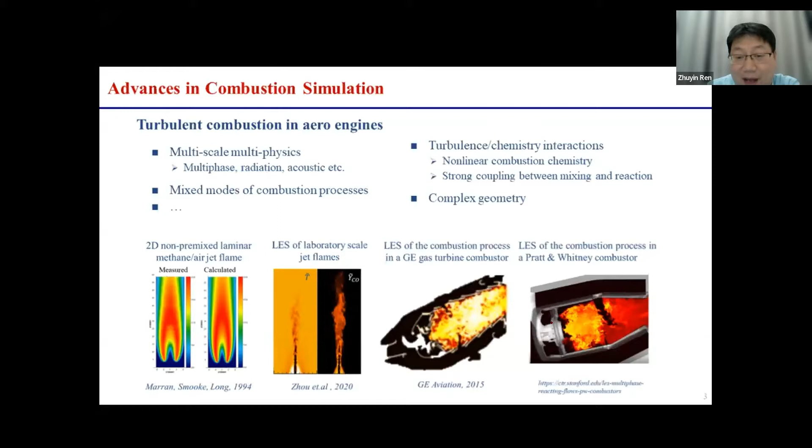Over the past 30 years, with developments in computers, numerical algorithms, and turbulent combustion models, we have seen big advancements in numerical simulation of flames. For example, back in the 90s we could do 2D simulations of laminar flames. Nowadays, we can do large eddy simulations of both laboratory flames and practical combustion devices like aero engine combustors.

Back in 2014, for revolutionary computational aerosciences, the so-called CFD Vision 2030 project laid out quite a comprehensive roadmap for high-fidelity aerospace simulations, including modeling and algorithm development needs in various areas. Within physical modeling, the use of realistic chemistry in large eddy simulation of turbulent flames is one need.

And on the algorithm side, uncertainty quantification is also quite an urgent development need. So in the following, I will describe our recent progress in these two areas, specifically the use of detailed chemistry as well as UQ in the context of the transported PDF method.

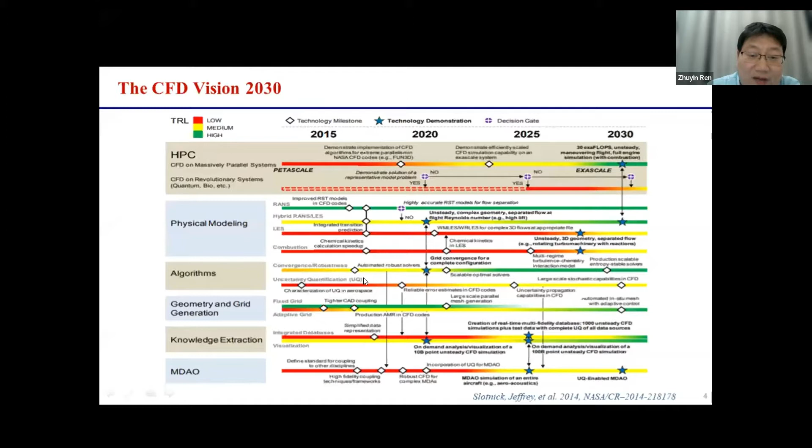Now, we know turbulent flames involve a wide range of length scales as well as chemical time scales. So very often, for practical combustion devices, one cannot resolve all the length and chemical time scales in turbulent flames by so-called direct numerical simulations. This is just computationally too expensive. So very often, for practical combustion devices, one uses statistical models like RANS or the LES approach.

In both these approaches, only the integral length scale or the large scales are resolved, while the small scales, like small eddies and sometimes the small flame features, are not resolved and need to be modeled. One thing I want to emphasize here is that, unlike non-reacting flows, in which the small scale motions like the small eddies are dominated by the large scale motions, and in that scenario the modeling for the non-resolved small scale phenomena is pretty straightforward.

For turbulent reacting flows, unfortunately, the most important heat release processes occur at these very fine flame structures, which are not resolved and which should be properly accounted for in turbulent combustion modeling. So because the small scales are not being resolved, we run into this big challenge in terms of modeling the mean reaction source term.

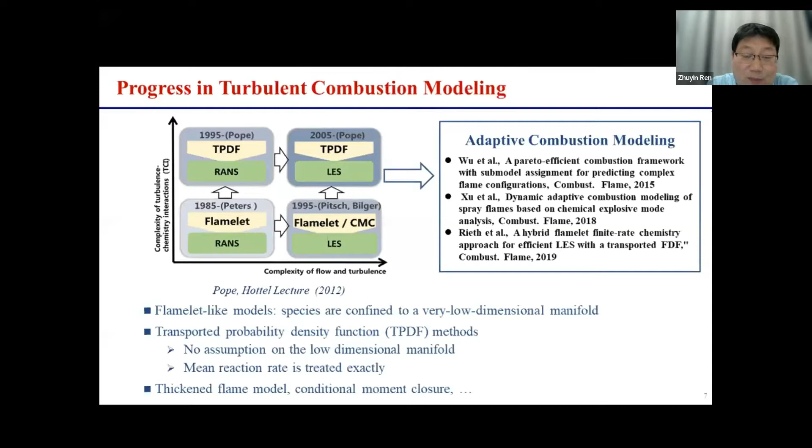So no matter what, in terms of combustion modeling with transport PDF-like models, we don't assume the existence of a low-dimensional manifold, and in the transport PDF method the mean reaction rate is treated exactly, without any modeling. So in that regard, transport PDF modeling with detailed or realistic chemistry has an advantage in resolving near-limit phenomena. Next, I will briefly review some fundamentals of the transport PDF method. Then I will describe our recent work in zone adaptive modeling based on the transport PDF method.

Now let's assume we are considering the one-point, one-time joint PDF of compositions. What you see here is the governing equation for the joint PDF of composition, which consists of enthalpy and species mass fractions. In this transport equation, you'll notice that the chemical reaction source term is in closed form. Because we only use a one-point, one-time PDF, we don't have any gradient information, so the term which represents micromixing, essentially a molecular diffusion effect, needs to be modeled.

So the first success we see in the application of the transport PDF method dates back to around 2000, pioneered by a group at Cornell as well as Imperial College by Professor Peter Lindstedt. In that application, they demonstrated that for the really challenging Sandia flame D, E, F series, by using the transport PDF method, you can well represent local extinction and reignition. So that's the fundamentals of the transport PDF method.

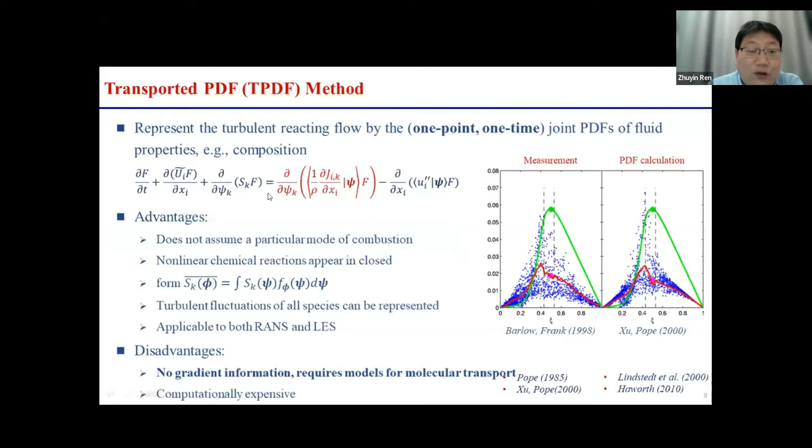Due to the high dimensionality of the independent variables, if you directly solve this governing equation using a finite volume method, the number of independent variables is pretty high. So in reality, very often we use a particle-mesh solution method, essentially a Monte Carlo method to represent the joint PDF. In the simulations, you release a whole bunch of computational particles, and each particle represents one parcel of fluid. These particles evolve in the computing domain following the velocity field, and interact with each other by exchanging mass and energy, which essentially represents the micromixing process.

And also, these particles will react and essentially go through the homogeneous reaction process. So as I illustrated here in this animation, what we can see is this particle mesh solution method. The LES provides the PDF solver with resolved mean velocity and the field velocity, etc. And the PDF solver will feed back to the LES solver with the density as well as sometimes the reaction source information.

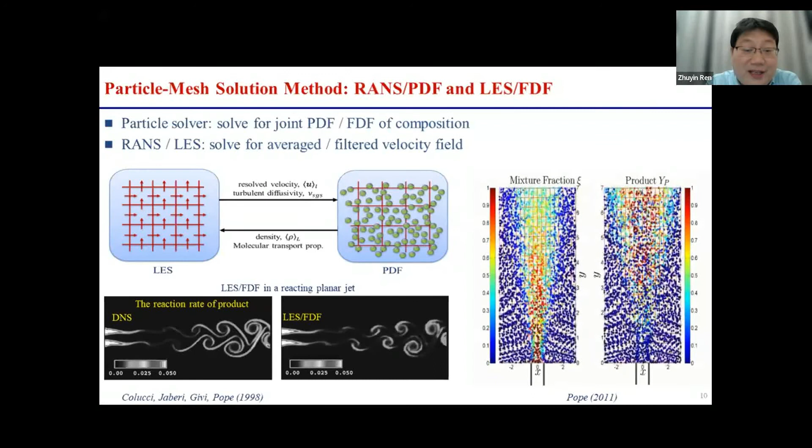In terms of the computational platform for the transported PDF method, over the past years we see both the block structured mesh computational platform such as the HPDF approach, and also unstructured and commercial platforms like ANSYS Fluent, which does have transported PDF. People also coupled the transported PDF method within OpenFOAM, the open source code. People have demonstrated the use of transported PDF for both laboratory flames as well as practical combustion applications.

As I mentioned earlier, the first successful application of transported PDF is for non-premixed flames, like the Sandia flame D-F series. Nowadays the application of transported PDF has been extended to premixed flames and partially premixed flames, as we recently demonstrated for the Sydney partially premixed jet flames, and we obtained very good agreement with experimental data. Also Han et al. extended transported PDF to simulating sooting flames, and recently we extended it to simulating the dilute ethanol spray flame.

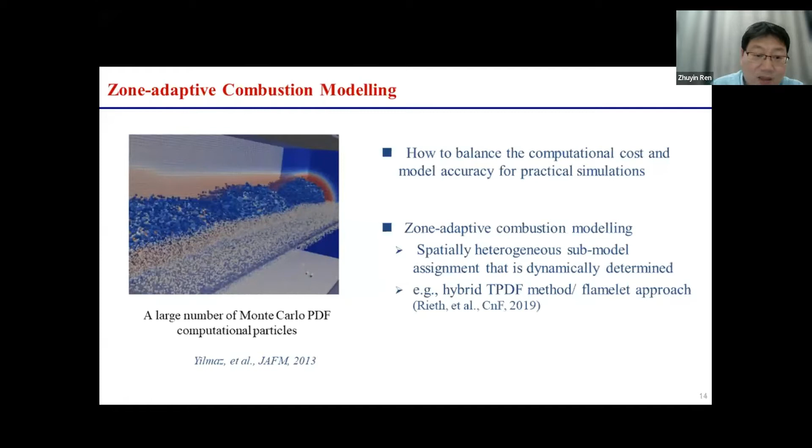So in terms of the coupling between the sub-models in this adaptive approach, what we do is we use a base model to solve the whole domain, and this base model will provide the high fidelity PDF region with necessary boundary conditions like the mass flow rate, etc. So those are buffer regions.

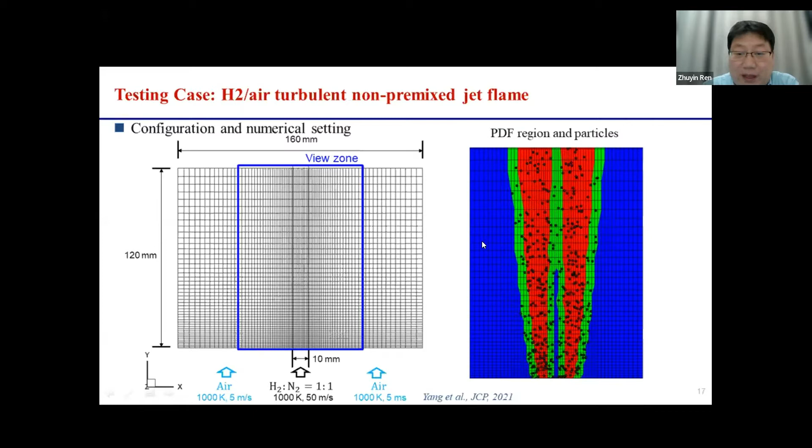Now, with the adaptive modeling approach, what you will see is only along this high intensity reaction region do we assign the transported PDF method, and in the blue region, since there's essentially no reaction activity, we use the one-step laminar flamelet model, and essentially you don't have any computational particles.

What I'm showing here is a comparison between the different modeling approaches. You will see three results here. The laminar flamelet model is the prediction with this model with a one-step mechanism; these are the blue curves. The TPDF is the standalone PDF method, where you solve the problem using the transported PDF for the whole computational domain.

The adaptive approach means only in the highly intense reaction region you use transported PDF. Otherwise, for the remaining regions, you use the laminar flamelet model with simple chemistry. So the key message here is that with this zone adaptive modeling approach, it can maintain the same accuracy as the standalone transported PDF method. So the accuracy is preserved.

We also examined the convergence characteristics of this zone adaptive modeling approach, and what we found is that the RMS error decays with the number of particles essentially the same as the standalone PDF method. More importantly, compared with the standalone transported PDF method, for this really simple problem we can achieve a computational speedup of about 2.1 for the whole simulation.

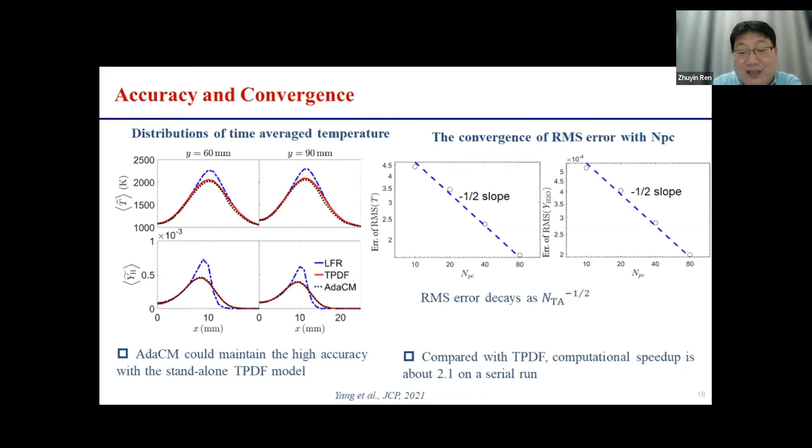So with this adaptive modeling approach, we can maintain the high accuracy of the standalone transported PDF model, but at the same time greatly reduce the computational cost. So that's the progress we made for the transported PDF method in terms of how to accelerate the calculation, by using zone adaptive modeling.

Another key ingredient for which the transported PDF method very often gets criticized or doubted is its modeling of the micromixing process. So in the next few slides, I'm going to introduce what we have done for micromixing models. As I mentioned, since we very often consider the one-point one-time PDF, we don't have the gradient information, right? So the molecular diffusion has to be modeled.

What a micromixing model does is describe the conditional diffusion rate, and a typical micromixing model can be cast in the following general form. The evolution of particle composition due to molecular diffusion can be represented by two pieces of information. One is the mixing format: within a computational cell you have a bunch of particles, and how a particular particle interacts with the surrounding particles is governed by the mixing format.

The second ingredient in a mixing model is how fast you exchange information, mass and energy, with the surrounding particles. This is governed by tau, which describes the scalar mixing time scale.

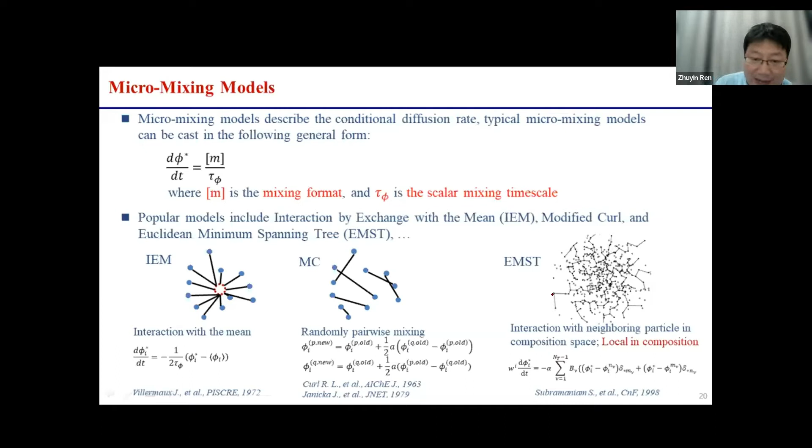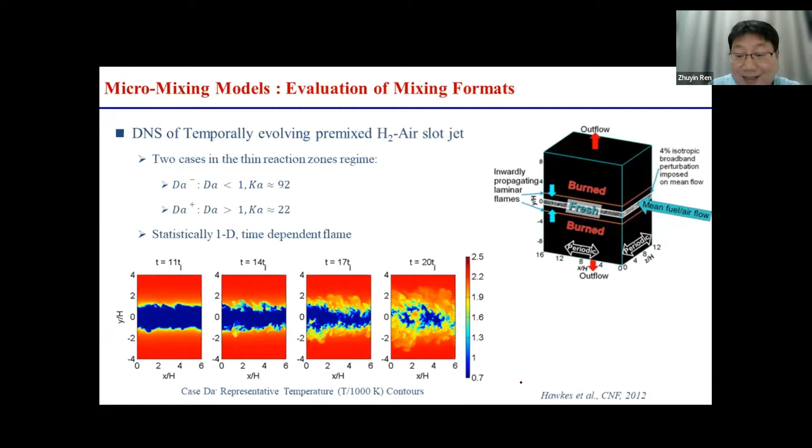So the first thing we did is evaluate how important it is to maintain localness when we consider mixing. We consider the DNS data of a temporally evolving premixed hydrogen-air slot flame. In this DNS flame, the flame is propagating from the outside towards the center. What you see here is the temperature contours at different time instances. Here we consider two cases, both in the thin reaction zone regime. The DNS was performed by Hawkes back in 2012.

So what we did here is perform a Lagrangian transported PDF simulation in conjunction with DNS. We perform this 1D flame calculation, and the transported PDF particles evolve their position following this equation and their composition following this equation. The unique thing in this type of simulation is we can extract all the needed information from the DNS data, so we can supply the velocity, the turbulent diffusivity, etc., and also the reaction source term from the DNS.

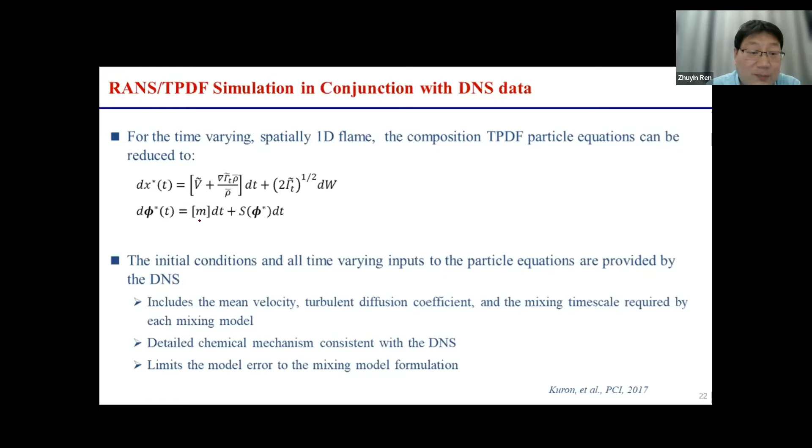So from this study, what we see is, for premixed flames as well, the localness in composition is very important to get an accurate prediction of the flame evolution. Now, one more thing: for the EMST mixing model, it is quite time consuming to construct the Euclidean minimum spanning tree in composition space, so the computing cost is relatively large. So we thought, is it possible to come up with a simple model which can maintain the localness in composition, but at the same time cut down the computation cost? This is what we recently came up with, the so-called kernel constrained mixing model.

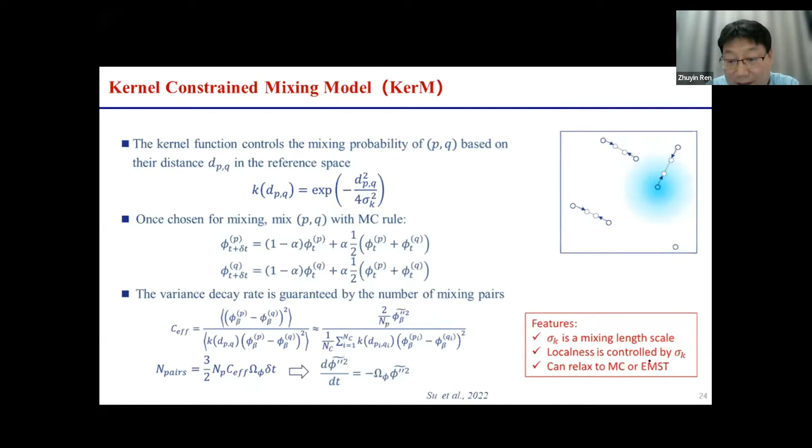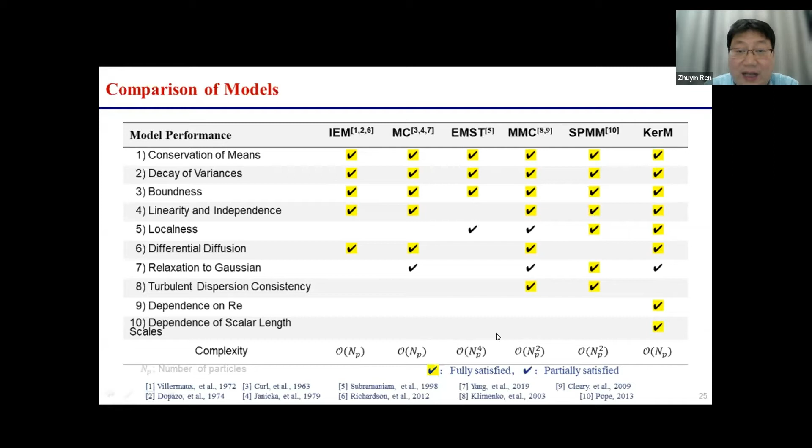If we do a quick comparison of the model performance with the existing ones like IEM, modified Curl, EMST, MMC introduced by Klimenko, and SPMM introduced by Steve Pope back in 2013, our kernel constrained mixing model has all these properties, and particularly the computational cost, in terms of how it scales with the number of particles in the cell, is O(N). So this comes down dramatically compared to the EMST mixing model.

So the key message here is we have one model, the kernel mixing model, which can represent the localness. In the future, we will come up with a model for the kernel size, so the kernel size will be dynamically determined by the local flame and flow characteristics instead of manually specified by the user. So that's the progress we made for the mixing model.

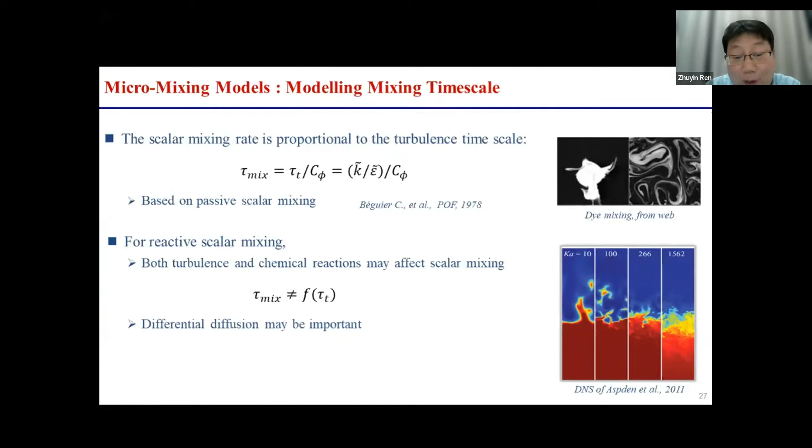But when it comes down to turbulent premixed flames, the story is a little bit different. In a turbulent premixed flame, the local gradient is not only affected by turbulence, it is also controlled by the flame, so essentially controlled by chemical reactions. So in turbulent premixed flames, the mixing time scale is not only a function of the turbulent time scale, it will also depend on chemical reactions, essentially the flame structure.

So we look at scatter plots of some representative DNS data sets. We consider two cases of premixed flames. These are actually Bunsen flames at different Karlovitz numbers; case A is close to the flamelet regime, and case C is close to the broken reaction zone regime.

We show the scatter plot of the radicals plotted against the progress variable. As you can see, even for the case close to the broken reaction zone regime, the scatter plots are still scattered around certain laminar flamelets. Inspired by this observation, maybe we can model the flame-induced scalar dissipation by introducing a reference flame, essentially the laminar flames.

Then the flame-induced scalar dissipation can be modeled by taking this reference flame and multiplying by the PDF of the progress variable. One nice thing about the transported PDF method is that the PDF of the progress variable itself is available in the solution, since we solve a whole bunch of particles that represent this PDF distribution. So in the transported PDF method, the flame-induced scalar dissipation can be modeled once we have a reference flame structure.

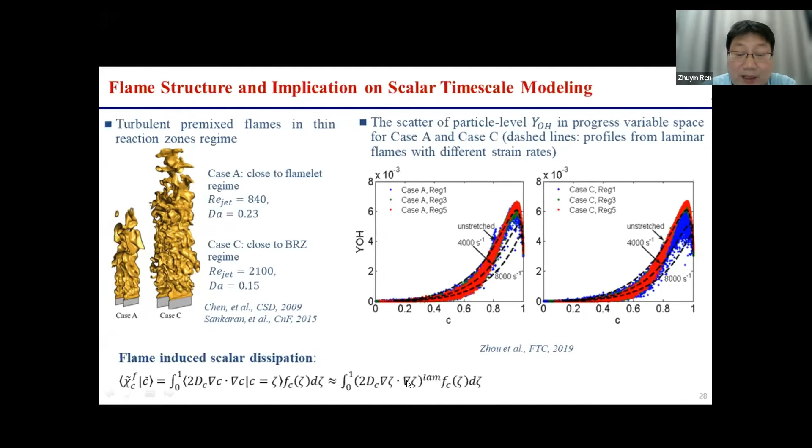Now, once we know how to model the flame-induced mixing, we come up with a hybrid mixing time scale using this formula. Essentially, in turbulent reacting flows, for the reactive scalar we consider its mixing governed by two processes: the turbulence part, which is the conventional mechanical-to-scalar ratio model, and the second part, a flame-induced contribution.

And we quantified the relative contribution by this segregation factor. So essentially, this is a normalized progress variable variance. In the flamelet regime, we know the variance is large and is actually approaching 1. So this model will degenerate back to the one where the gradient is 100% governed by the flame. And if it is in the broken reaction zone regime, the variance will be small, and eta essentially will approach 0.

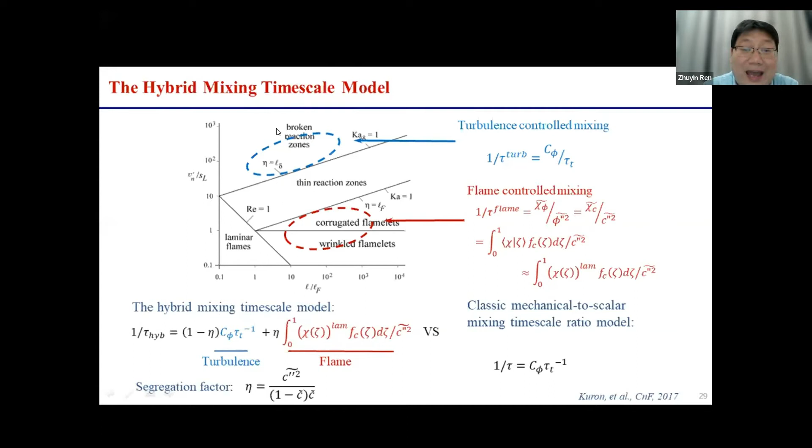So in the broken reaction zone regime, the model will degenerate back to the conventional mechanical-to-scalar time scale ratio model. So as you can see, this hybrid mixing time scale model at least can model these two extremes correctly.

Back in 2017, we did a preliminary assessment of this model in this temporally evolving premixed hydrogen-air slot jet flame, the one we saw before. This is the DNS data, and this is the hybrid model. As you can see, for both of these two cases, one near the broken reaction zone regime and one more in the flamelet regime, the hybrid model will reproduce the DNS data.

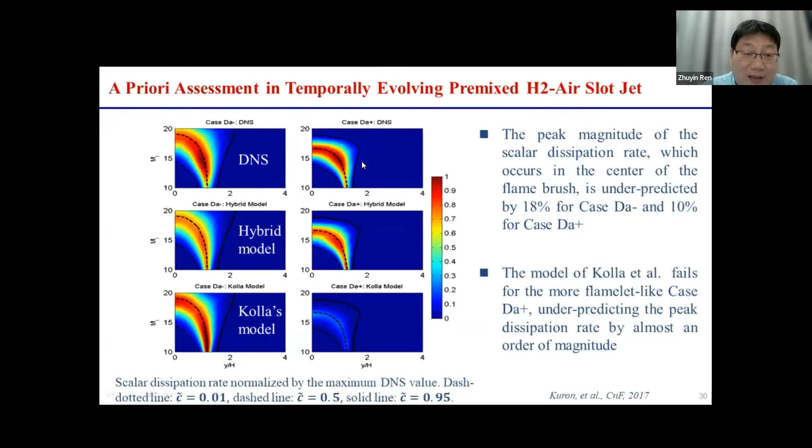So actually, with this hybrid model, we can do more things. Since we introduce the reference flame for the flame-induced dissipation rate or mixing time scale, actually the mixing time scales for species are different. So by using the hybrid model, we can model differential diffusion in different flames, and that will be important these days when we consider the hydrogen economy and hydrogen flames.

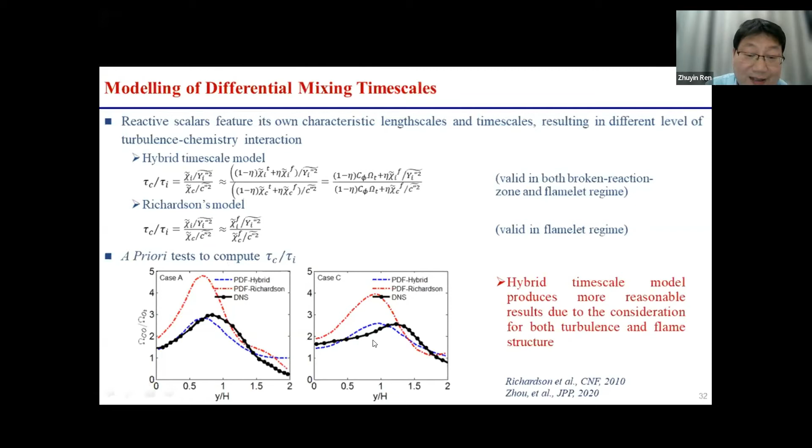So with this hybrid timescale model, we can model the species mixing timescale by using this formula. What we do here is an a priori test to compute the ratio of the progress variable and individual species mixing times. What you see here is the mixing time scale ratio between CO and O2. The black dotted line is DNS data, and this is the prediction from our hybrid time scale model, for case A and case C. For both scenarios, this hybrid model represents the differential mixing time scales for species.

Most recently, we demonstrated that differential diffusion is quite important for predicting soot. This is what Zhou et al. did in the PCI paper. The DNS data set considered here is a temporally evolving non-premixed ethylene flame, and they extract mean turbulent diffusivity and species mixing frequency from DNS to feed the RANS/TPDF simulation. If we use the IEM model or modified Curl model without differential diffusion, this is the DNS data and this is the prediction.

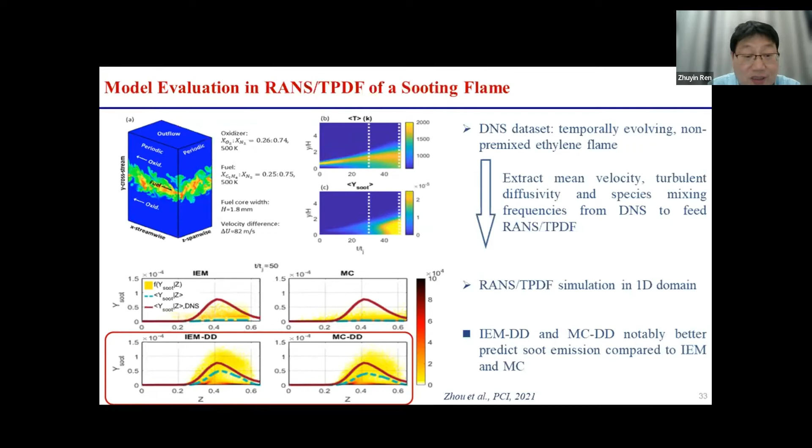If you consider the differential diffusion of gaseous species, you can dramatically improve the prediction for soot. That demonstrated the importance of differential diffusion for soot prediction, and also the accuracy of our hybrid timescale model for modeling differential diffusion. So that's the progress we made for mixing models.

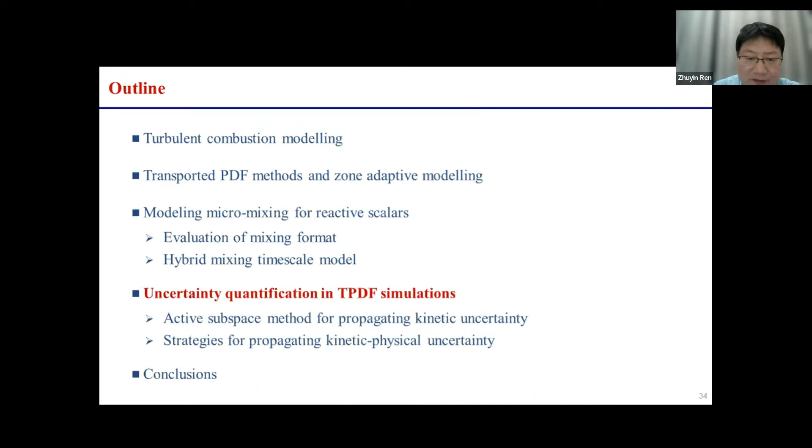For the next 10 minutes, I will briefly go over what we did for UQ in TPDF simulations. As we know, nowadays computational simulation can be applied to complex systems, but it's hard to quantify the accuracy of the CFD results. In CFD simulations, you have errors coming from model assumptions, errors or uncertainties in the simulation inputs, and also errors in numerical resolution, such as a finite number of grid points.

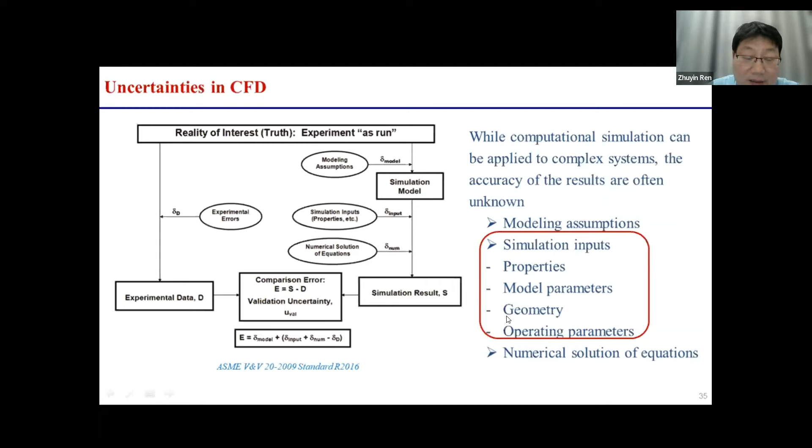One particular thing we want to address here is how to quantify the impact of the input uncertainty on the predictions. So essentially, we need to propagate the uncertainties in the properties, model parameters, or boundary conditions to the final results.

So for the uncertainties in CFD, once you know the uncertain parameters and the PDF distributions, the task is pretty straightforward. What you can do is draw a whole bunch of samples in this high-dimensional input parameter space. For example, it could be kinetic parameters, turbulence model constants, and also boundary conditions.

So for each individual sample, you can run a CFD calculation and get one prediction. By performing many CFD calculations, you get the PDF, for example, in this case, of flame speed. So this so-called direct Monte Carlo sampling approach is very straightforward.

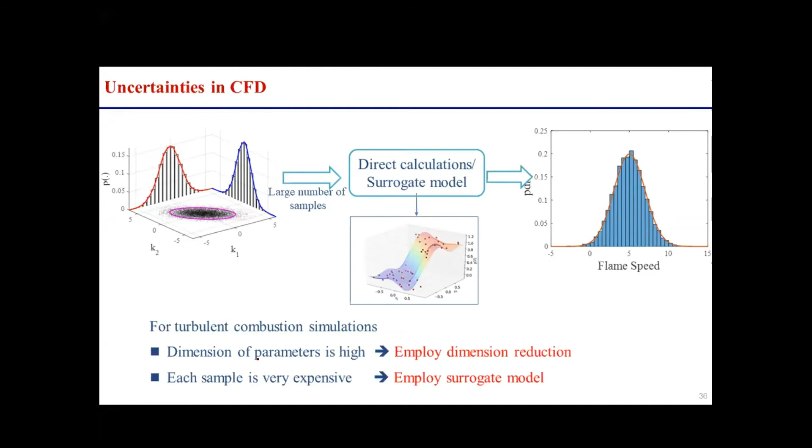The problem here is, for turbulent combustion simulations, the number of parameters with uncertainty could be very high. For example, if we use detailed chemistry, the rate constants in the individual reactions could be many, right? And also you could have turbulence model parameters and combustion model parameters as well as boundary conditions. So the dimension of the parameter space is high, so you need to draw many samples.

So that's one challenge. And even worse, we know each individual CFD simulation is already quite time consuming. So it's almost impossible to compute many CFD simulations to get this PDF. So for UQ in CFD, we need to do two things. One is how to reduce the number of uncertain parameters, so we need to essentially use a dimension reduction approach. The second is how to employ a surrogate model to speed up the individual CFD calculations.

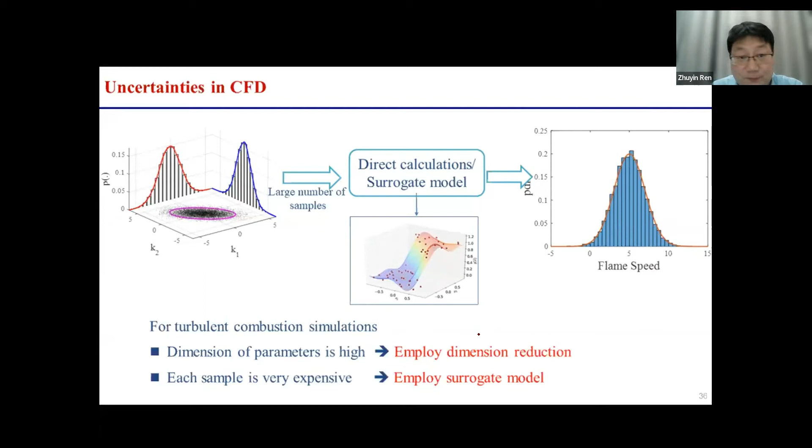So in the following, I will introduce a particular method called active subspace for dimension reduction. Here are some fundamentals about the active subspace. The active subspace method is a dimension reduction technique proposed and developed by Constantine around 2014 or 2015. The unique feature of AS is it detects directions of the strongest variability using evaluation of the gradient, and subsequently exploits these directions to construct a response surface on a low-dimensional subspace. Later on I will explain what this means.

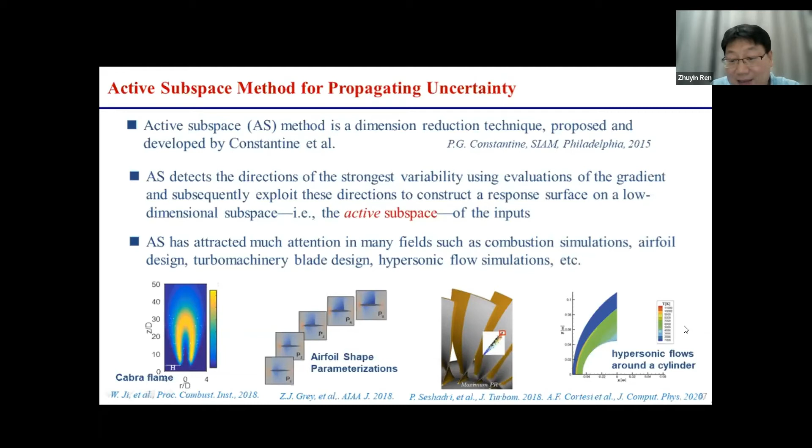One thing we notice is active subspace recently has attracted much attention in many fields, such as combustion simulations, as what we did for the flame, and also for airfoil shape parameterization, turbine blade optimization, as well as the flow around a cylinder.

Now, the key mathematical basis for the active subspace method is as follows. Suppose you know the input parameters with uncertainty, and let's denote them as x. For each individual parameter, you know the PDF distribution of this uncertain parameter. Now let's consider the output. Essentially, this is the quantity of interest, for example flame lift-off height, etc.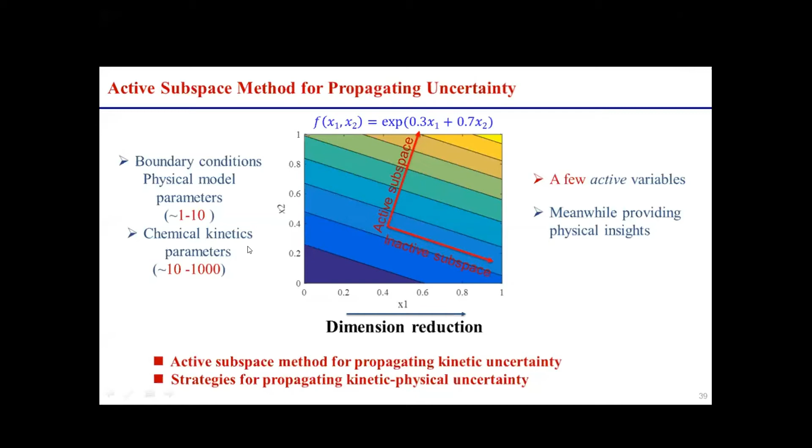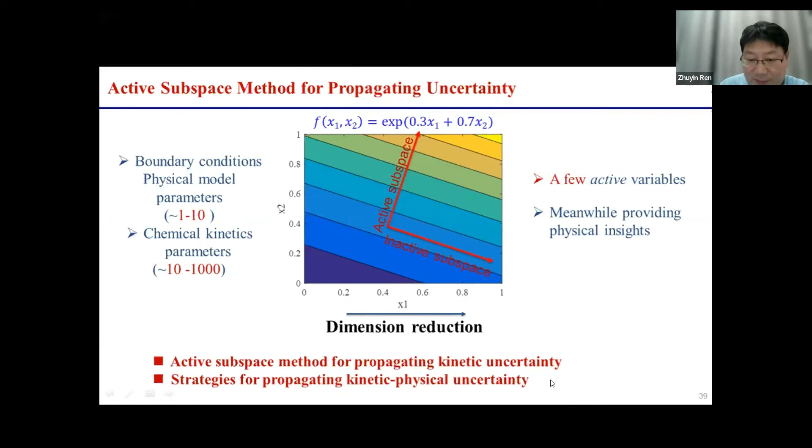So what I will demonstrate is, by using the active subspace method, we can greatly reduce the number of uncertain variables. And I will briefly describe how we can propagate the kinetic and physical uncertainty in flame simulations. As a start, what we demonstrated back in 2018 is for the autoignition process. We considered hydrogen, methane, and other fuels.

And the quantity of interest we consider here: F here is ignition delay time, for example, and the input with uncertainty is also the rate constant. We specify a log-normal distribution for this rate constant, so you have a certain uncertainty, and the uncertainty factor is taken from the literature. And what you see here is essentially the distribution of the eigenvalues of the covariance matrix.

What you'll notice is, for the hydrogen flame, you only have one leading eigenvalue and one leading active direction. We also notice that this leading active direction is actually a combination of these two elementary reactions, R9 and R16. And by only considering the change in this active direction, you can very well represent the distribution of the ignition delay time. So essentially, all the data are collapsed along this one-dimensional curve.

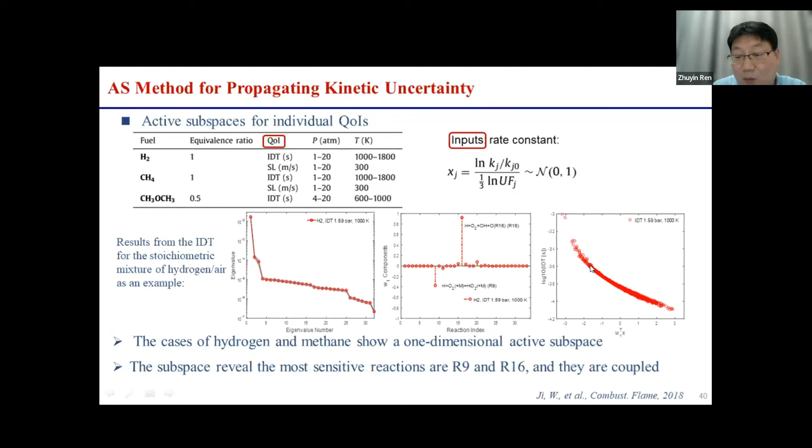So that's what we did for the 0D autoignition case. Then we extend this method to propagate the kinetic uncertainty in this hydrogen autoigniting flame, the so-called Cabra flame. The quantity of interest we consider here is the liftoff height, denoted as H. Constructing the covariance matrix by running many CFD simulations is expensive, so here we choose the representative 0D autoignition process to construct the active directions. This is what we're showing here.

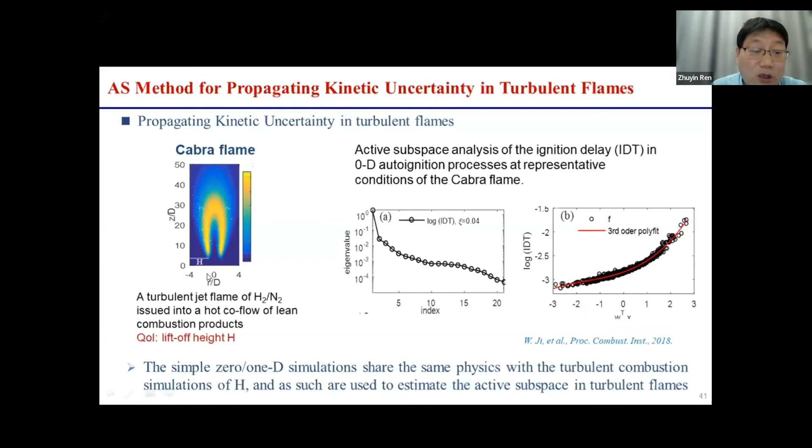By performing many autoignition simulations, we identified the active directions. The reason we can do this is that we know this flame is governed by the autoignition process, so we can use the 0D autoignition process to identify them. Once we have this active direction, we can perform samples only in this 1D active direction and obtain the PDF of the liftoff height. Now, for a CFD simulation, you no longer have only a single point prediction; you have a PDF distribution.

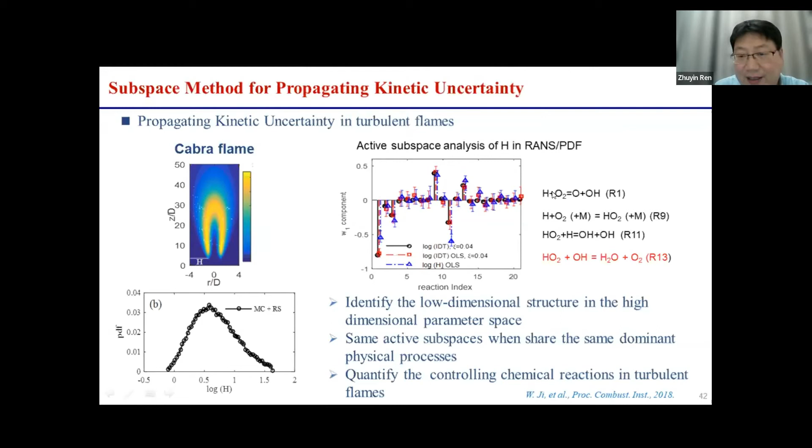More important than that, we can examine the leading components of this active direction and identify the governing elementary reactions for the liftoff height. What we notice is that for this particular flame, the key elementary reactions governing the liftoff height are these four.

That's what we did for propagating kinetic uncertainty in the flame simulation. More recently, we demonstrated how we can propagate kinetic and physical uncertainty in flame simulations. This is the example we are considering: suppose we have this Burrows and Kurkov supersonic jet flame. The fuel is coming out from the jet, and the surrounding is high-temperature air. For this flame, we are interested in two quantities of interest: the liftoff height and the flame wall distance.

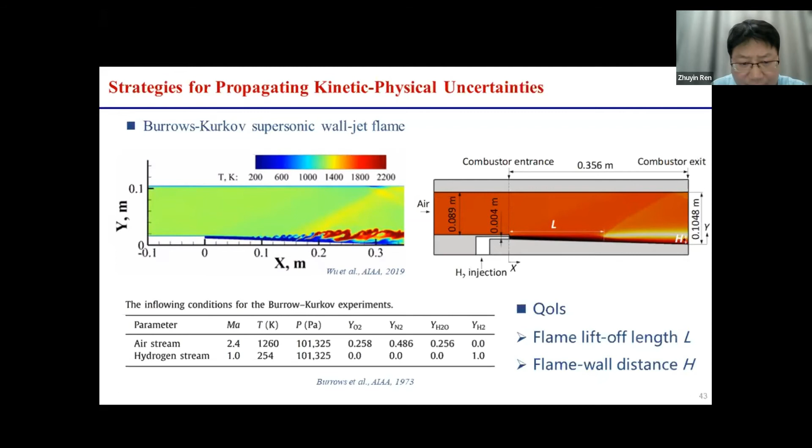The uncertain parameters we consider are the 21 uncertain kinetic rate constants, so this is kinetic uncertainty; for the hydrogen flame you have these 21 elementary reactions. In addition, we also want to consider turbulence and combustion model parameters as well as uncertainty in boundary conditions. For example, we consider the k-omega SST model constant beta star, the turbulent Schmidt number, turbulent Prandtl number, PaSR combustion model constant, the normalized fuel injection pressure, and the airstream static temperature.

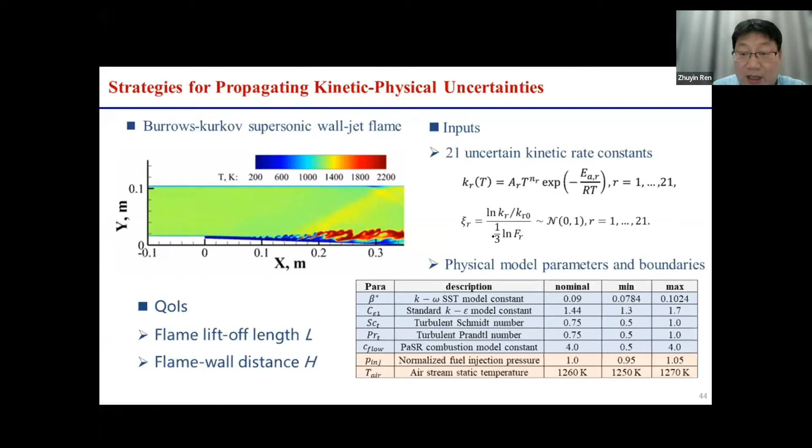This is the nominal value we are taking for each model parameter, and this is the range. We assume a uniform distribution for these parameters, and for the kinetic uncertainties we assume a normalized log-normal distribution.

The strategy we are taking falls into two tiers of reduction. In the first tier, for the kinetic parameters, we use representative 0D and 1D autoignition and flame simulations to identify the 1D important direction in the kinetic rate constants. So now you reduce from 21 to 1 for chemical kinetics. Then we combine this one active direction for chemical kinetics with the turbulence and combustion model parameters.

Then we do a second active subspace reduction, and we reduce once again to a 1D active subspace. So now we lump 1 plus 6 or 7 parameters into finally one active direction. Then we use the response surface together with Monte Carlo sampling, and eventually we get the PDFs of the quantities of interest, in this case the liftoff height and the flame wall distance.

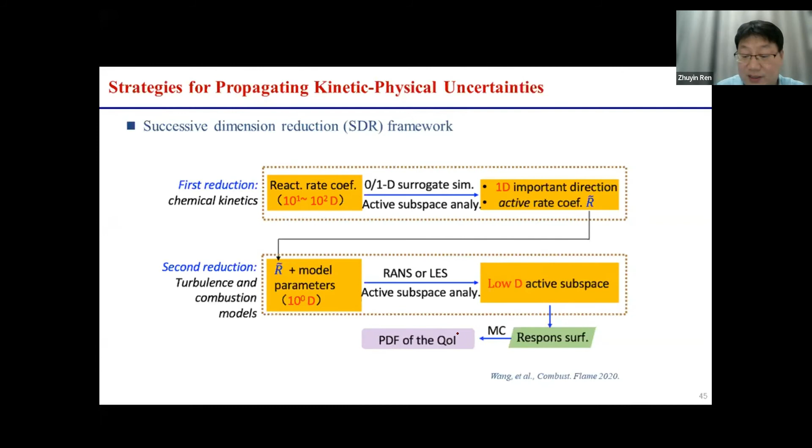Now here is what it looks like. Okay, now for flame liftoff length, what you can see is if you look at the components of this active direction, you will see the large contribution from the chemical reaction, and also the contribution from the turbulent Prandtl number. So this is quite informative, considering the flame is governed by the autoignition process. You have fuel mixed with hot air and it gets autoignited, and the flame is initiated and stabilized. So it's no wonder the liftoff height is very sensitive to the chemical kinetics.

So as you can see, the active subspace method can identify the controlling physicochemical process. In contrast, for the flame wall distance, if you look at the components of the active directions, the leading factor is the turbulence model parameter like beta star and also the Schmidt number. This is also understandable considering the peak temperature. As long as the flame is formed, the peak temperature is determined essentially by the location of the stoichiometric mixture fraction, and that is governed only by the mixing process. So it's no wonder it is affected most by the turbulence model parameter as well as the Schmidt number. So the active subspace can identify the individual controlling mechanism, in this case for the liftoff length and the flame wall distance.

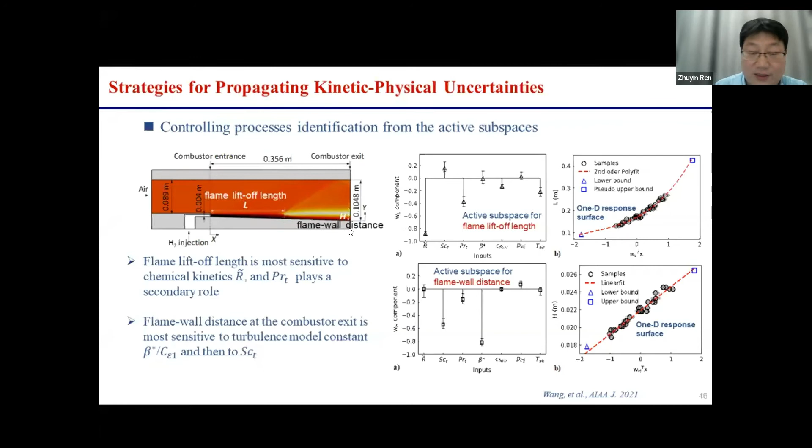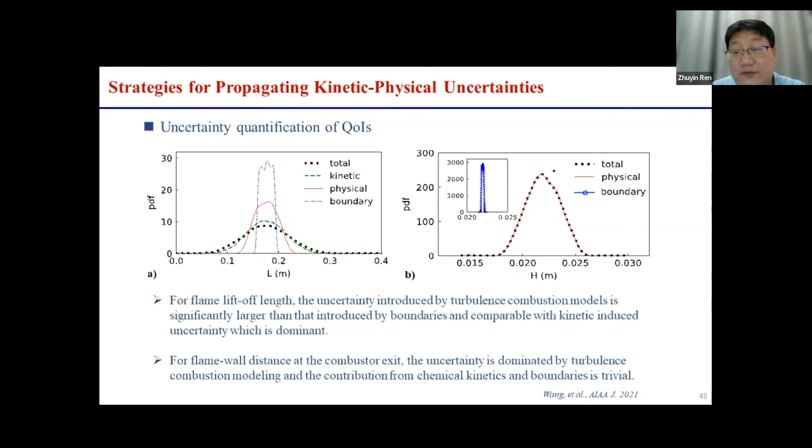So that's pretty much the progress I want to share with you for transported PDF methods. For PDF modeling, we have come up with a zone-adaptive modeling framework, and for mixing models, a new kernel-constrained mixing model. It can account for localness in composition space while at the same time being efficient. We have also done work on modeling the relative scalar mixing time scale, and the new hybrid model can recover the correct flamelet and broken reaction zone regime limits. We also attempt to quantify the uncertainties in physicochemical parameters and propagate them in the simulations. We show that a low-dimensional active subspace exists in kinetic uncertainty, and we can quantify the physicochemical uncertainty through successive dimension reduction by active subspace. The active subspace method is also informative about the controlling physicochemical processes in turbulent flames.

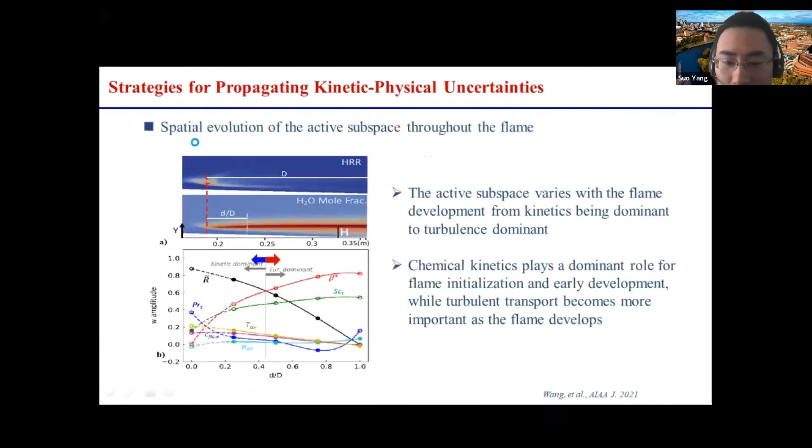Okay, very nice. So the next one is: can you talk a little bit about the coupling between transport PDF and multi-phase models like for soot and spray, especially if both use the particle method? Yeah, that's a very nice question. So in spray flame simulations, if we use the transport PDF for the gas phase, we do have this Lagrangian distribution.

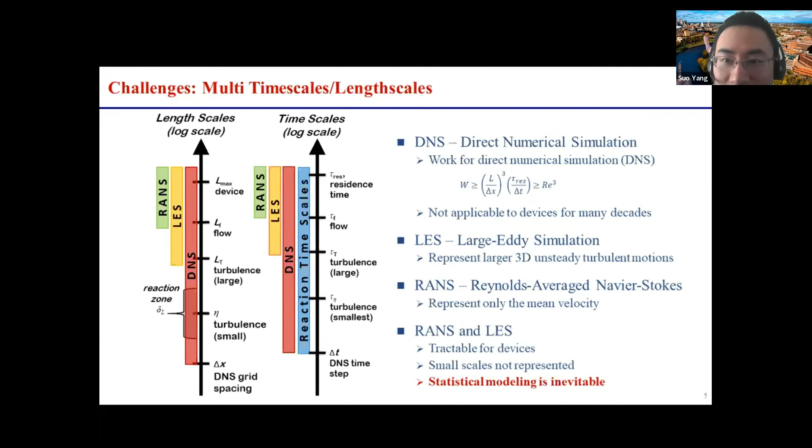So the next question is from Professor Jay Guo. Why focus on piloted premixed, non-premixed, and partially premixed flames? I think the pilot is very limiting for practical applications like gas turbine combustors, where flame stabilization is by multiple swirling flows. I'm interested in hearing Professor Ren's comments.

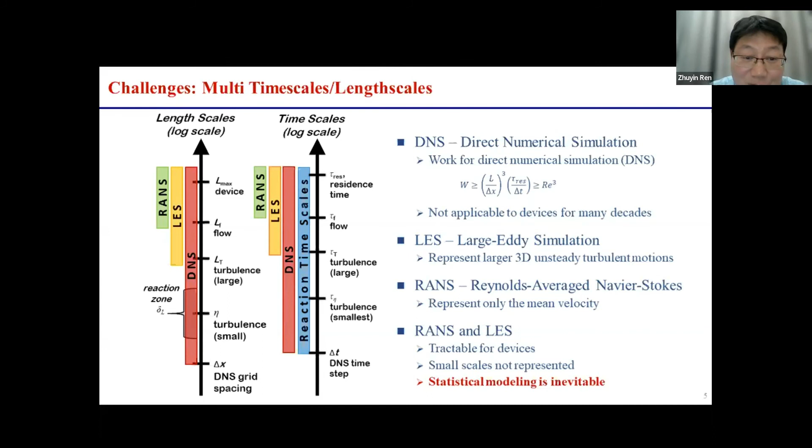And also within my own group, in results I don't show here, we are using the adaptive zone model approach for certain model combustors. That one is also a swirling flame, and the results are quite promising.

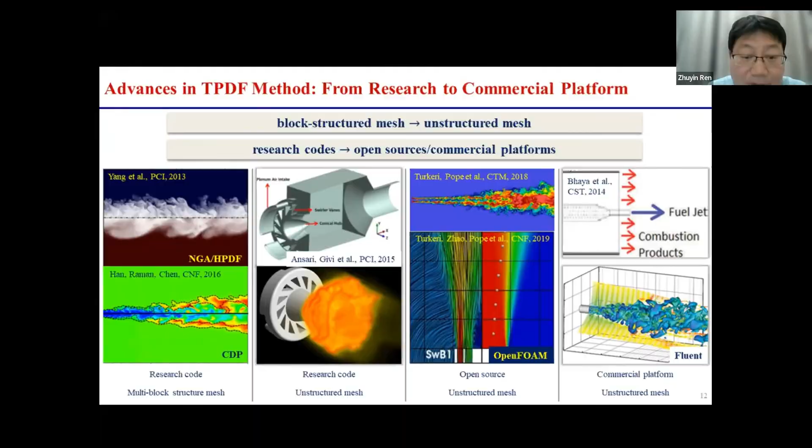The next one comes from myself again. Can you show us the criteria for your adaptation method and comment on its sensitivity? Also, I guess coupling this adaptive TPDF with dynamic adaptive chemistry might provide good performance. Here I only show a few results we got within the past 2 years. As illustrated here, the PDF zones are dynamically determined, and right now we use two different criteria. One is based on the local Damköhler number.

As long as the turbulence-chemistry interaction is intense, judged from the local Damköhler number, we will use the TPDF method. So as you can imagine, the TPDF zone will be dynamically changing during the simulation, particularly in this LES context. So that's one criterion we tried.

We also tried criteria like, for non-premixed flames, you can also set the criteria based on the reactivity, that is, based on the mixture fraction. So the point is, in this dynamic framework, the criteria for the PDF zone are user specified, and can be based on a certain physical quantity like Damköhler number, mixture fraction, etc. So that's how we assign the submodels.

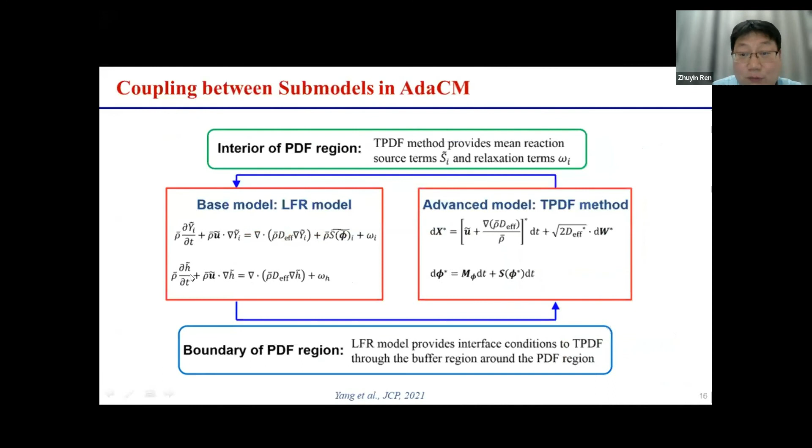So also, do you do load balancing here for parallel computing? That's right. For parallel computing efficiency, we use software we developed before, like x2f_mpi. During the chemistry step, particularly for the transported PDF zones, we rebalance the particles and chemistry integration among all the CPU processors. By doing that, we speed up the calculations. Okay, great, thank you.

I'm really sorry, due to time constraints I did not talk about the Eulerian PDF approach, the Eulerian stochastic field method or Eulerian PDF method. As you both mentioned, in addition to the Monte Carlo implementation, people also came up with Eulerian and stochastic field representations for the TPDF method, and each of them made big progress recently. We do see publications for flame simulation using the Eulerian stochastic field method as well as the Eulerian PDF method.

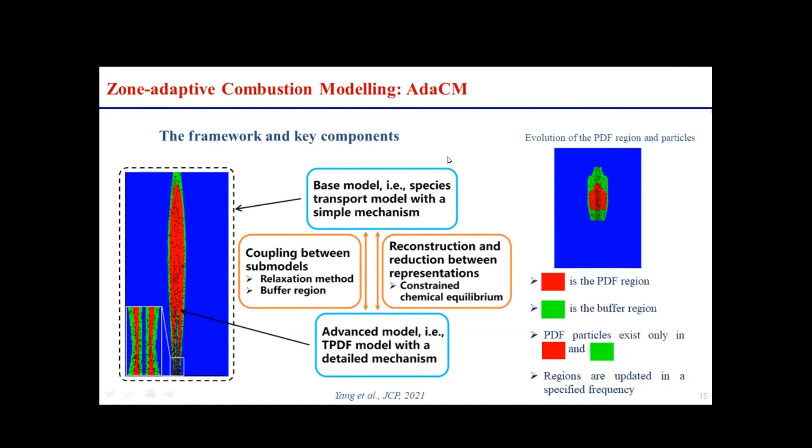Your hybrid mixing timescale model seems like it can also be extended to generate a new PaSR model. So I'd like to seek your comments on that. I think you use it for the transport PDF, but I believe it can also be. Yes, that's right. So right now the hybrid mixing model only works for premixed flames, and recently we also want to extend it to non-premixed flames, including partially premixed flames, and also how it is constructed as a contribution from the flame structures. I think it will also give certain hints for the time scale parameters in other combustion models, like the one you mentioned, PaSR. It will be really interesting looking into that. Yeah, because the form looks very relevant.